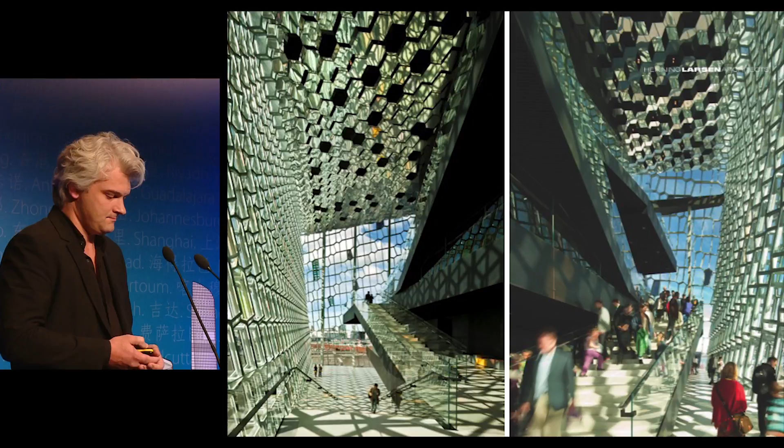But when we work in China, we have a lot of different approaches. We have experienced that this approach of focusing on the cultural values of the project is really interesting in China. The leaders are more and more interested in projects that relate to the Chinese context.

In Foshan, in southern China, we were asked to design a cultural center for a new city. It is 700,000 square meters. And because the city is so famous for its parades and large festive arrangements, we proposed a public space entirely pedestrian in the heart of a new city.

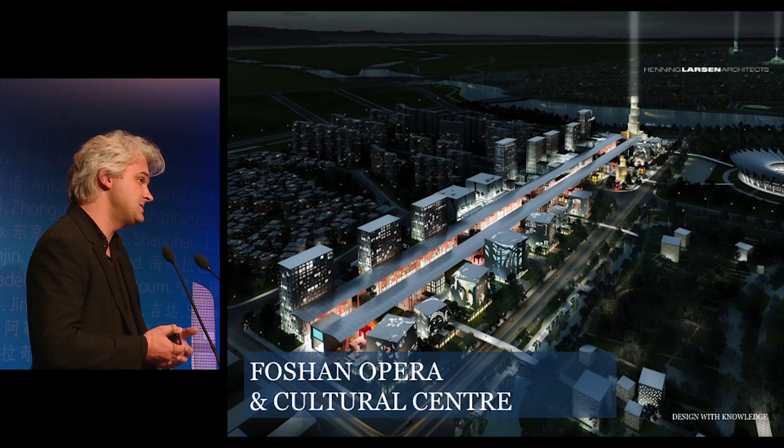It's a program where we mixed the cultural buildings that were asked for. We added a lot of commercial aspect to it to make a mixed city. And then we created this unique space, which we believe will be a fantastic container for these events.

Of course, it's also based on the climatic conditions. Being in southern China, this canopy that covers this plaza will offer a very intimate but protected environment where we believe we will encourage people to be more outdoor.

The main building at the end of the axis is an opera combined with other functions, and its very structural facade is derived from a pattern that is very typical of this region, Foshan. The opera is divided into 4 parts and creates this public space between them.

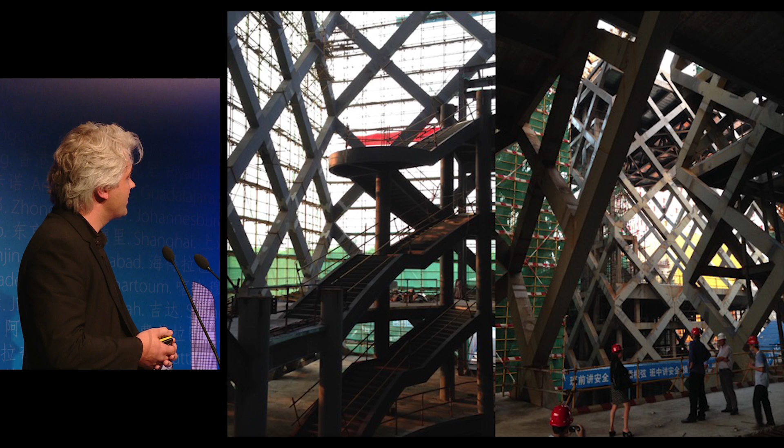And it is getting built now. We can already experience when we are there that the massing is creating wind and a nice environment inside.

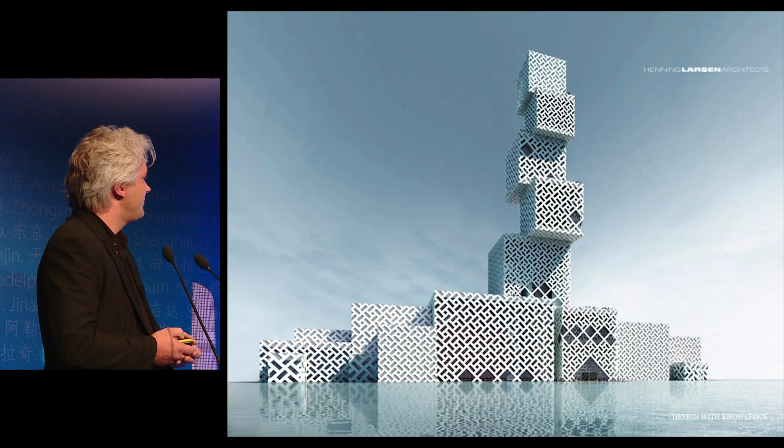At night it becomes a lantern. Foshan is also very famous for its lanterns, and they're very proud of those. This part was also something that relates to them.

In Yuhang, we were asked to do a similar program, a cultural center in the middle of a new city. There are many of those going on in China these days.

And here, we decided to split the program in 2 parts. One large part, which is a podium and the opera building itself, that relates to the ancient structures that have been found recently in the area that are several thousand years old.

We decided to base the design on recreating such a podium situation for the people, to create a sacred, almost sacred space for the culture, for the large gatherings to happen.

But next to it, we divided the program. They expected us to do a big building, of course, but we fragmented it into many different buildings in order to create more a neighborhood, a sustainable environment in which communities can exchange. We also mixed commercial into it, which we always push to enhance the city and the fact that it can be alive the whole day.

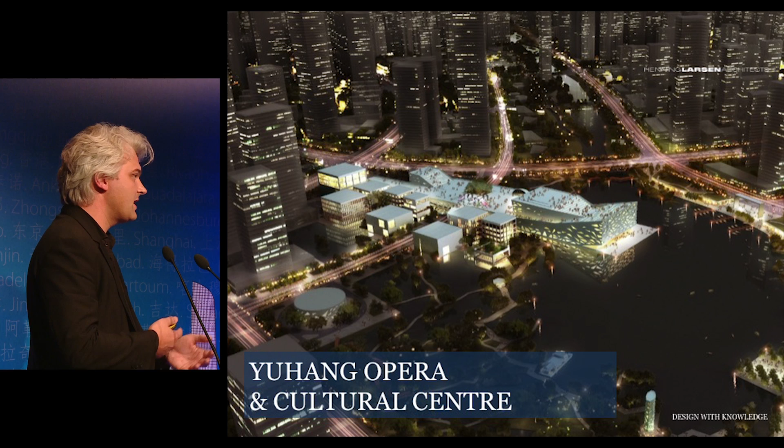So this is the elevated plaza that opens up to a theater that becomes a stage.

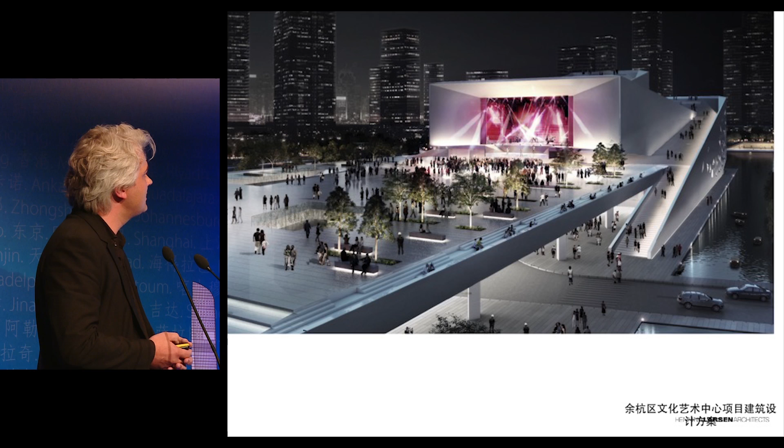Next to this large and monumental element, we created this more human scale, intimate environment that relates to them as well, because it is a water city and they do have some of those in the region still. They were very happy to see that we continue this tradition.

Here it is not the architecture itself that is very important, it's the space between the buildings that we are focused on, creating a very nice environment. This is an art school that is also there. By offering them these fragmented buildings, we believe that we have created a setup for a new city center.

King Abdullah Financial District basically has the same approach as those I just showed. It is a development of 3 million square meters, and it's a design that focuses again on the quality between the buildings and the space between the buildings, the urban realm.

This is what was really special in this project. Again, the program was expected to be 2 million square meters of business and offices, and we added 1 million square meters extra of residential and community creating elements so that this city became more sustainable.

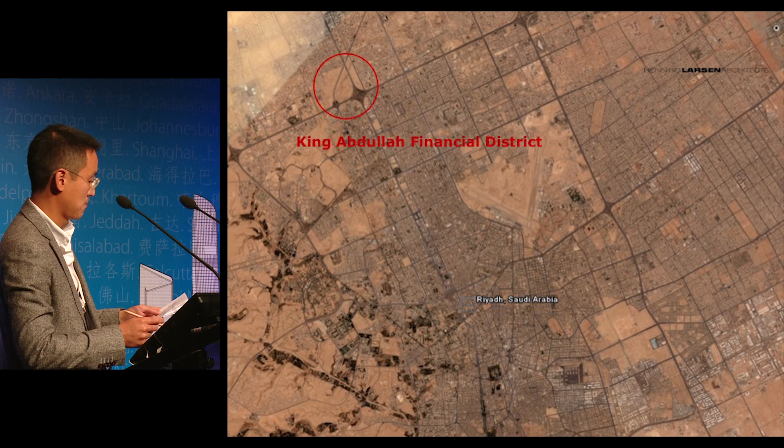Well, first of all, I'm just going to give you a little bit of background information here. As you can see here, this is our site, Riyadh. As some of you might know, at times it could be challenging to deliver a meaningful urban habitat in a desert environment like Riyadh.

Now, a little bit of the reasons behind this project basically. There are a number of mega projects being constructed in Saudi Arabia at the moment. King Abdullah Financial District is one of them, and its purpose is basically to provide a state-of-the-art infrastructure for the growing financial sector.

Apart from being a piece of prestigious real estate or investment, there's actually a more sober side to this particular development. The district is meant to function as a regional financial center or hub, part of King Abdullah's effort to diversify the economy beyond the oil sector. The financial district has been given a mandate to promote a global outlook to help nurture a new generation of young Saudis who could excel in the global marketplace.

Another aspect of this development concerns energy. Some of you may not know, but according to a recent report by an international think tank, Saudi Arabia actually consumes 25% of its total oil production. On that trajectory, by year 2040, they argue the kingdom might become a net oil importer instead of an exporter. This is disputable, of course, but nonetheless, the alarm bell is ringing.

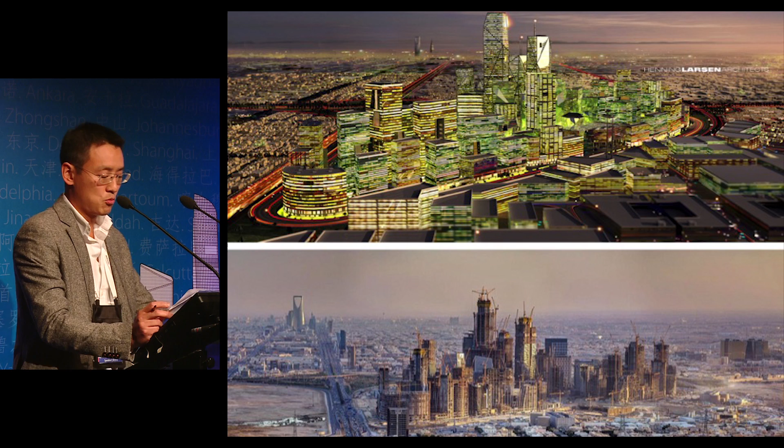Sustainability is a key agenda in this master plan, in this development. A lot of these buildings had been LEED pre-certified. Most of them are silver, a lot of them are gold, and the entire master plan, the entire district, is also to be LEED certified.

Anybody here in the audience been involved in this project? Yeah, I thought so. I'll be careful.

I'm not going to say too much about the sustainability credentials of some of these individual buildings or infrastructures. I think we're going to focus on sustainability at an urban level. What we want to focus on is a kind of sustainability encapsulated in the public realm between the buildings, something low-tech, perhaps old-fashioned, something very passive. We believe these are the very basic, fundamental attributes that would help deliver a sustainable urban habitat, economically, environmentally, and culturally.

We'll start with Genius Loci, basically sense of place. This is a picture taken from the outskirts of Riyadh. As you can see, these are the traditional mud buildings, and right in the middle here you can see Kingdom Center. Here you can feel the contrast between traditional and the ultra modern.

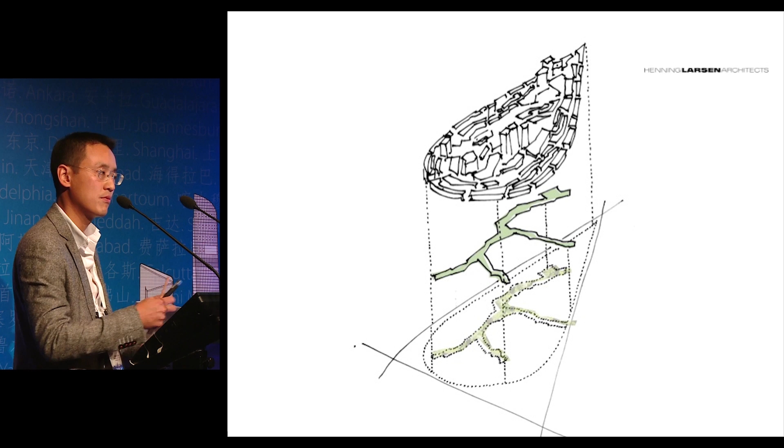The heart of KAFD is the wadi. As you can see in this concept sketch, we're trying to reinterpret what a wadi is. In this case, it is basically an urban plaza, an urban space, which occupies 35% of the total site area, and it acts as an artery that connects the different districts within the master plan. Most importantly, it is purely pedestrian oriented.

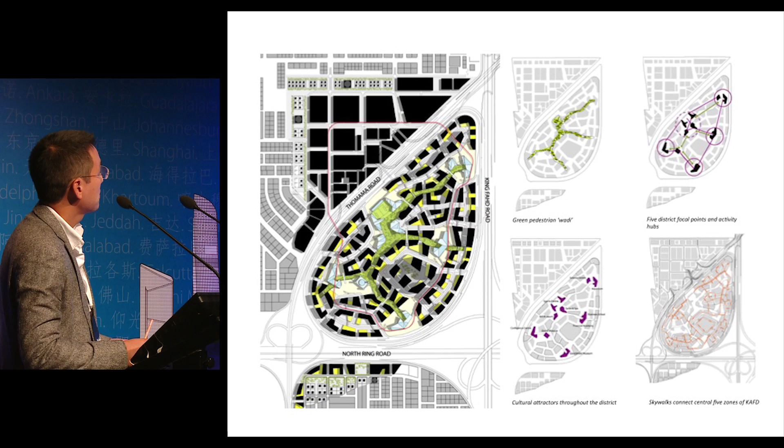How do we do that? We basically take a blanket with us, drink warm coffee, and sit outside in the sun. I think this is the spirit we're trying to convey, basically. It's these very fundamental little things that make a difference, and this is the kind of methodology we're trying to translate to a master plan.

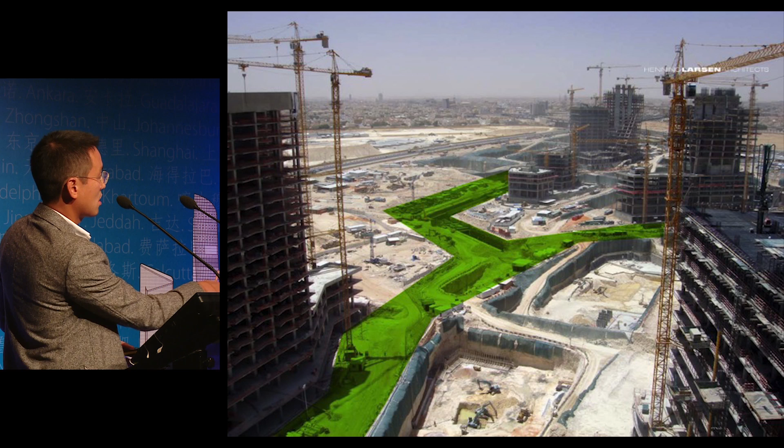Microclimate, it's to do with shade. The green here represents approximately where the wadi is. This picture was taken a while ago, in the very beginning of the construction process. As you can see, the distance between building plots is actually quite narrow. Again, the green representing the wadi.

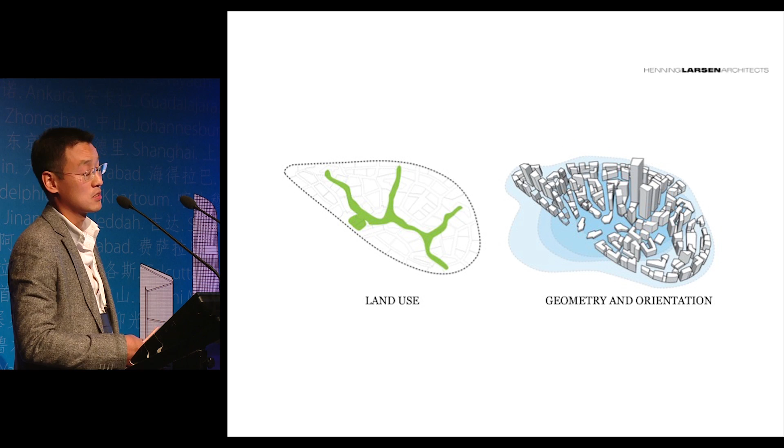One of the key features of the master plan design is basically to utilize the traditional desert townscape typology that was prevalent before the discovery of oil in the region. It's basically a lot of buildings packed together, divided by very narrow alleyways, to create shade, of course.

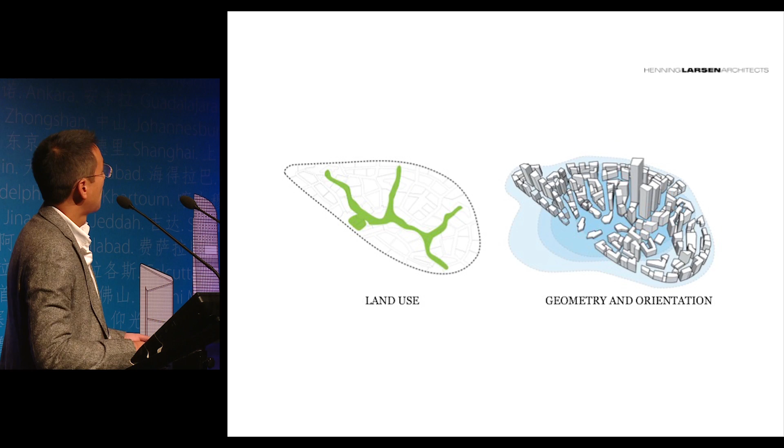In order to do that accurately, we've done a lot of simulations to make sure we have the correct heights, placements, and orientation of building volumes of each and every individual parcel within the master plan.

And of course, the other feature is that by carefully arranging these building volumes, you can actually manipulate the prevailing winds as well. In our case, we try to divert the wind around the master plan and over it. It's also possible to channel the wind through these buildings onto the wadi to create breeze.

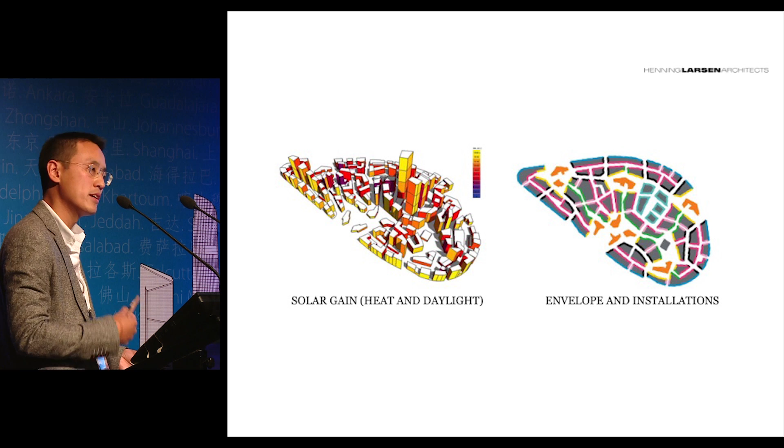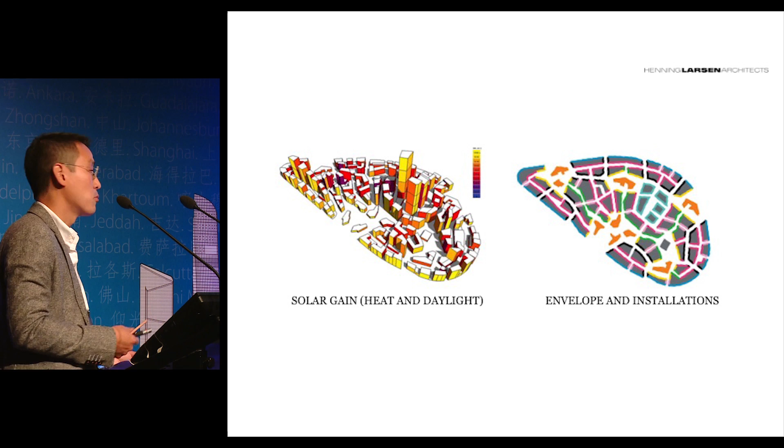Now, the combined effort of shade and breeze, we've discovered, can actually reduce the outdoor temperature on the wadi by 6 to 8 degrees. And this is real. Now that most of the buildings have been topped out, a lot of our colleagues in Riyadh have told us that it's actually quite comfortable to be outside on the wadi.

Again, of course, if you deploy that kind of strategy with very short distances between the buildings, you introduce shade, but at the same time you jeopardize the daylight. So the choice of materials and colors is very important, as you can see here—one is very dark and one is brighter.

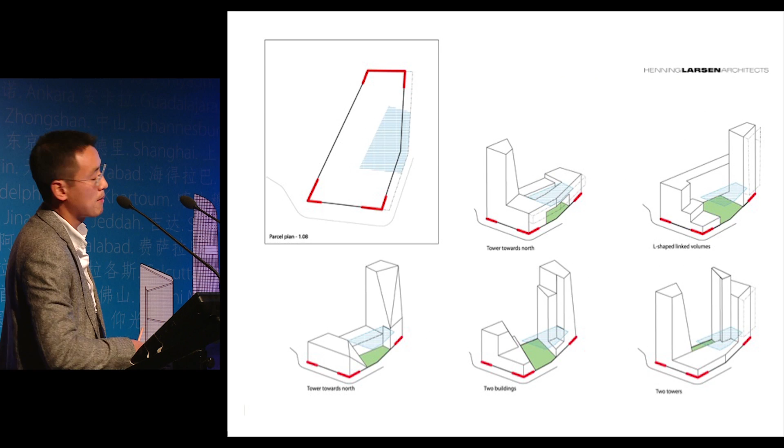Now, I'm just going to skip through these. Basically, these are samples of our master plan documents, just to make sure we can deliver the different variations of these building volumes, to ensure the microclimate strategy is properly coordinated within the master plan.

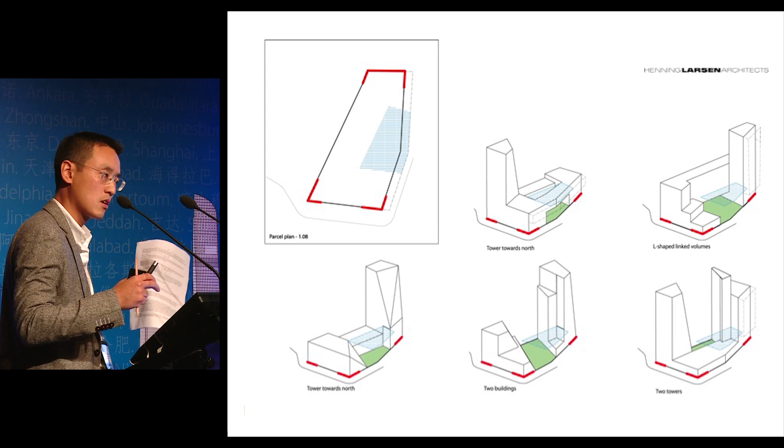One of the key features in KAFD is that we have a lot of skywalks or bridges connecting between buildings. In fact, all buildings are connected—you can pretty much walk from point A to point B, or anywhere within the master plan, through these bridges. These bridges are located on the first level above ground, and they're all air conditioned.

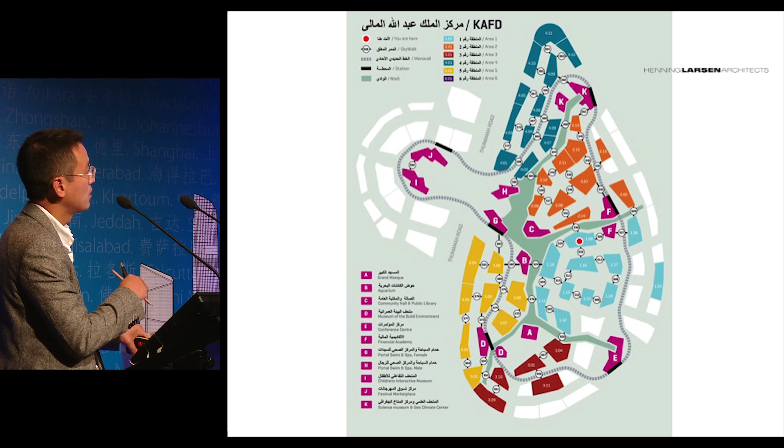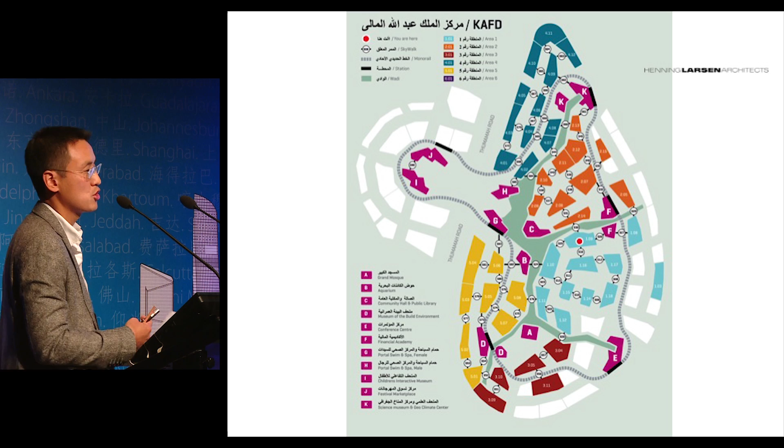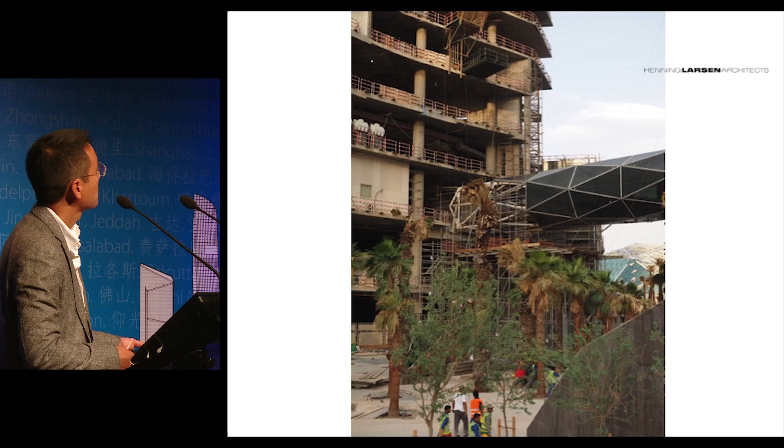These are the images—I'm just going to quickly flick through them. Now, that's part of the wadi. As you can see, it's shaded.

I'm afraid I don't have time to talk about the buildings we've designed in our own master plan, but I can tell you it hasn't been as easy as we thought, because we contradict ourselves a lot against our own master plan regulations. So that was a very interesting exercise.

But nonetheless, this is one of our buildings here. As you can see, we have a facade strategy that reflects the sun from above and provides transparency from below. Another building here is the Crystal Towers—basically, we try to use light materials or light-colored materials as much as possible, and minimal glazing.

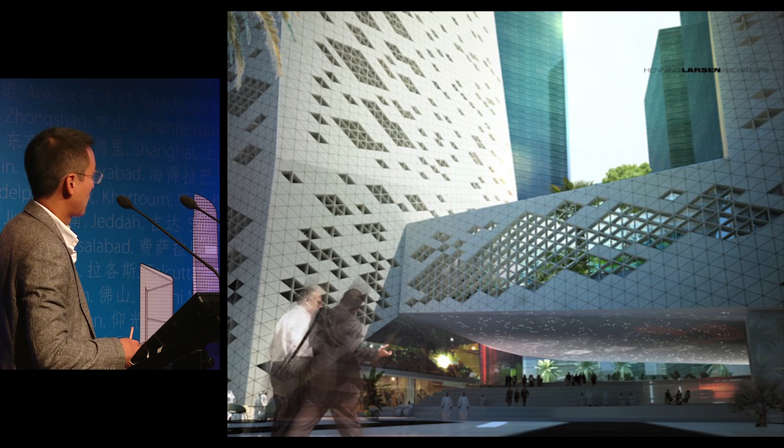Right, I will just wind up with this last slide. Basically, what we're trying to say, the main message today, is that it is very important to design good tall buildings, but it is also equally important to design good urban habitat between tall buildings. Thank you very much.